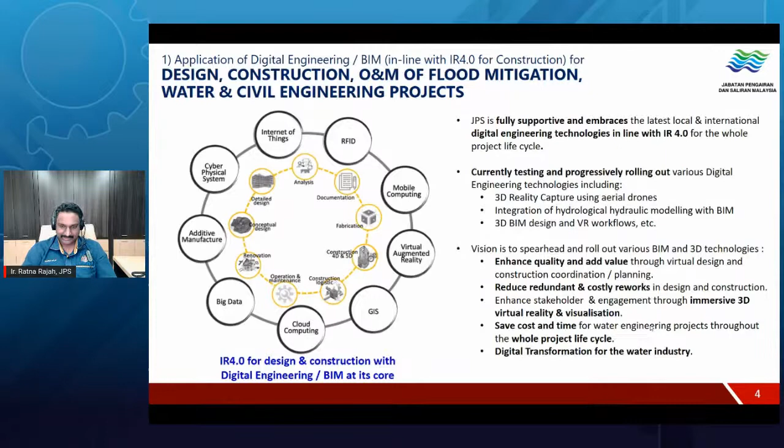Cloud-based project information management and common data environment starts from survey and data collection, design simulation and water resources system, followed by concept engineering design, detail engineering design, construction, and operation and maintenance.

In JPS, the green circle shows what we have successfully implemented, including 3D LiDAR survey, 2D aerial drone image and video capture, and 3D aerial drone photogrammetric survey. We are in the process of further implementation.

In design, we have gone up to 3D integration of 1D and 3D hydrological and hydraulic modeling, water resources model simulation using real-time digital hydrological network and radar data, and digital concept engineering and design. We are already implementing GIS for our planning and analysis.

Under detailed design engineering, we have gone up to the integration of 3D reality capture data for design, which I'll show in the following slides. In construction, we are looking into 3D drone photogrammetry survey and laser scanning, and we have currently applied this together with DBKL in one of our projects.

Lastly, about operation and maintenance, which completes the whole engineering project life cycle, this is digital asset inventory using 2D and 3D GIS, and to monitor the maintenance schedule and so on.

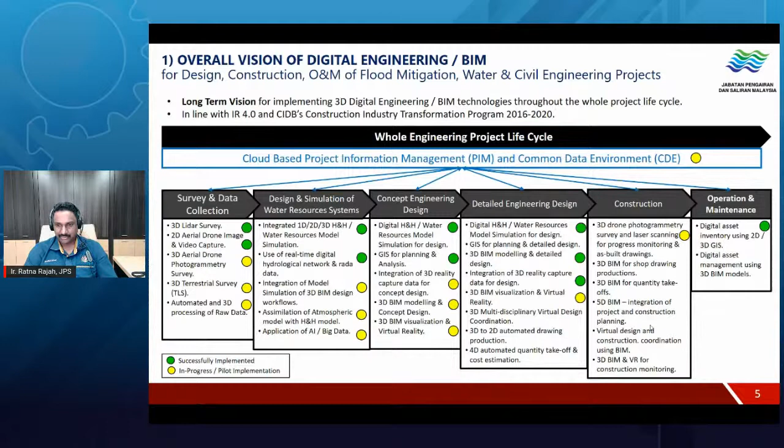So the evolution of the entire design, as you see, from 2010, from 3D GIS and modeling of smart tunnel, and in 2017 we started to use 2D drone imagery and videography. In 2018 we started with 3D drone photogrammetry and reality capture, together with ortho mosaic, digital surface model, digital terrain model, and contour lines using both digital surface model and digital terrain model. Last year we already started to use integration of flood modeling with 3D BIM.

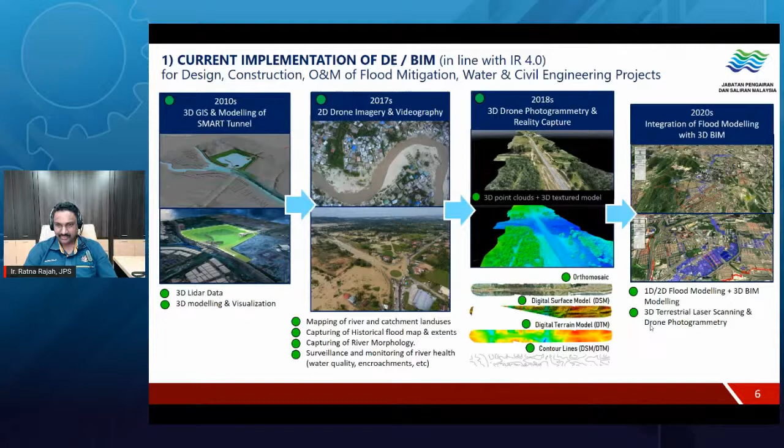I'll show you in the next slides. This is the latest product, developed together with DBKL. This was developed by our local engineer and specialist expert, engineer Chok Ho Seng. He's currently attached to Renhill, heading the water resources sector under Renhill Bersekutu.

And this is what we are looking at. He has vast experience in, if I'm not mistaken, about 6 overseas countries. He has been headhunted to get his expertise on this modeling. This is the way forward for the future.

By having developed this integrating 3D LiDAR data, 3D drone survey, and terrestrial laser scanning, it helps us produce this kind of simulation whereby we can identify and look at what are the best structural measures and non-structural measures that can be introduced to solve the flooding problems.

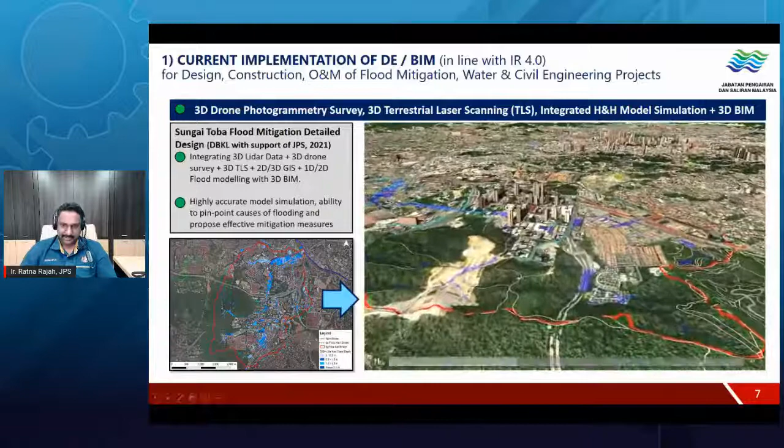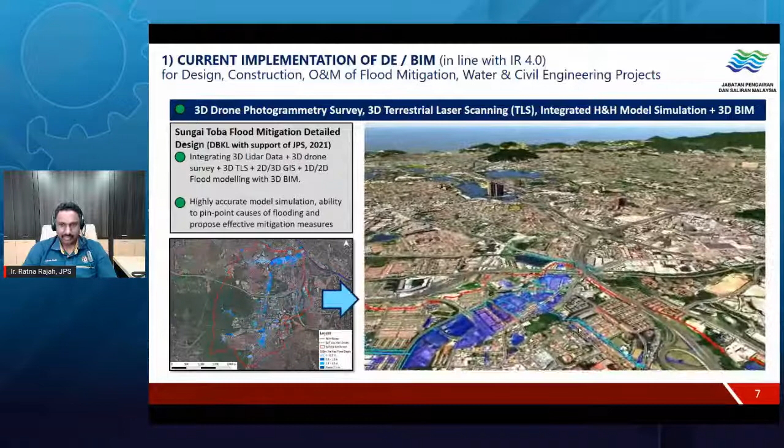The red line shows the catchment boundary. The light blue shows the drainage lines, and then these are the 100-year. The navy blue shows the 100-year ARI simulation showing the flooded or inundated area. So as we introduce structural measures, we can look at how we can reduce the flooding or control it at source approach. I will touch on all that later.

So this is how we will do our concept design of hydraulic structures using 3D drone reality capture and 3D BIM modeling. By capturing the 3D reality capture using drones, together with conventional 2D river topo survey drawings and 3D BIM model, we can merge the entire thing into a 3D reality model used for 3D concept design optioneering.

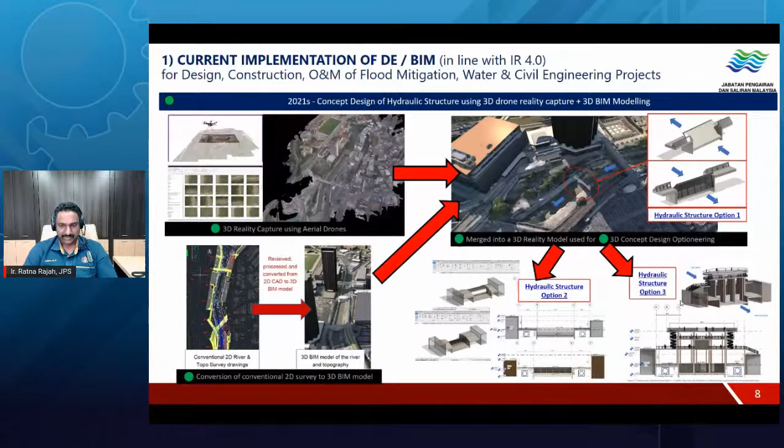So that's option one, option two, and this will be a great way for you to present to your top management, looking at what will be the best solution for that particular matter, the flooding, to solve the flooding issue at a particular area.

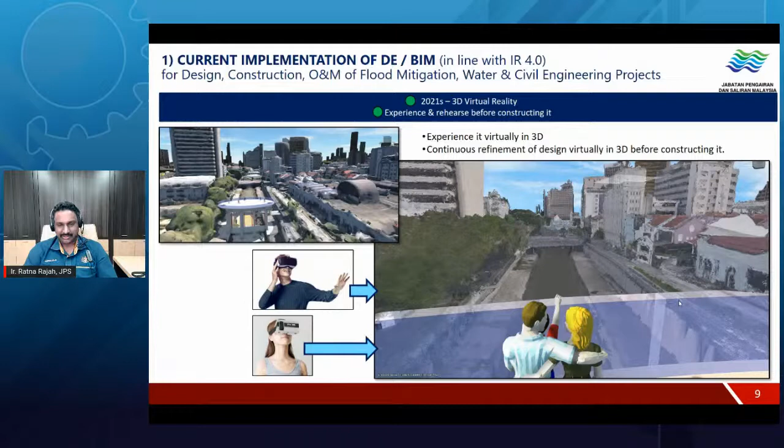And then we can also introduce all this experience virtually in 3D throughout constructing, or before constructing, to see how it's going to be. Continuous refinement of design virtually in 3D before constructing it. All this will save a lot of costs to the government and also to the industry players.

Other current initiatives we are doing include progressively rolling out 3D aerial drone survey and BIM design requirements in recent project tenders. We are exposing and upskilling staff on 3D digital engineering and building information modeling design workflows. We support and contribute to the implementation of 3D digital engineering and BIM initiatives in the local industry. We are continuously testing and implementing digital engineering BIM technologies in various aspects of the project lifecycle by working collaboratively with other agencies and the private sector.

This will be the future and vision of JPS: to continuously roll out various digital engineering and BIM technologies throughout the whole design construction spectrum for the whole project lifecycle, to integrate digital numerical hydrology and hydraulic model simulation technologies with 3D GIS and 3D BIM technologies. This is the most important now.

Apply AI and big data workflow automation to various processes in water modeling, management and decision support, as well as in other design and construction aspects of water projects. This will help river basin managers make a more informed decision when it comes to pressing the button to open the floodgate or not, or to release water, etc. This will help a lot for water managers.

These are the brief topics I will run through with you today, generally Gamuda focused, along with some developments and innovations we have had the opportunity to contribute to the industry over the past 10 years, and some outlook.

For those familiar with IEM journals, I extracted this from an article collated by Engineer Khoo Chi Min and Engineer Dr. Ooi Teck Aun, who are both very famous Malaysian engineers involved in tunneling business. Generally in Malaysia, post-independence, we have completed about 37 tunnels totaling around 300 kilometers since 1901. It may sound a lot, but compared to many developed countries, it's actually quite minimal. By and large, these tunnels were constructed using conventional methods such as drill and blast and NATM, the New Austrian Tunneling Method, though nowadays we like to call these SCL tunnels instead, shotcrete lined tunnels.

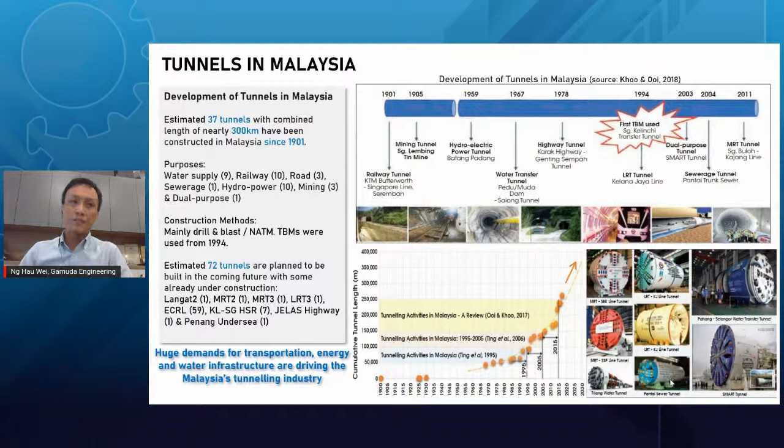The first mechanized tunneling using TBM, or tunnel boring machines, was introduced in 1994 for the Sungai Kelinchi Water Transfer Tunnel project. Around the same time, multiple other projects such as Putra LRT line, Smart Tunnel, Pantai Sewer, and the Pahang Selangor Water Transfer and KVMRT utilized mechanized tunneling methods to construct modern tunnels. Future and under-construction tunnels include East Coast Rail Link, Langat 2 projects, MRT 3 hopefully, and the now shelved high-speed rail project. Myself and Gamuda are very fortunate to be involved in constructing many of these recent tunnels, which I'll highlight in the next few slides.

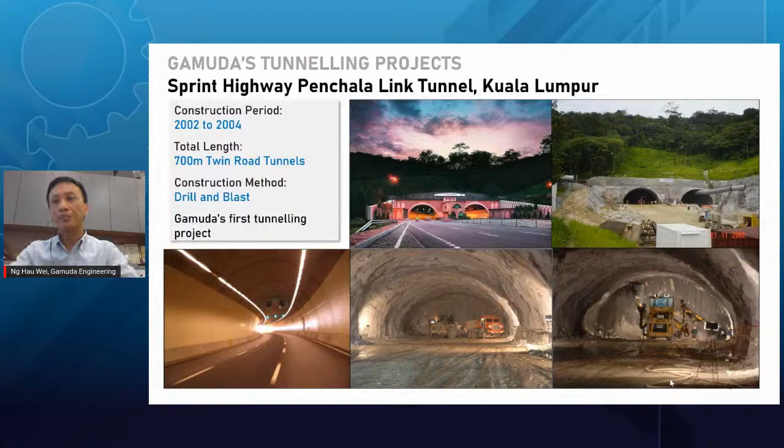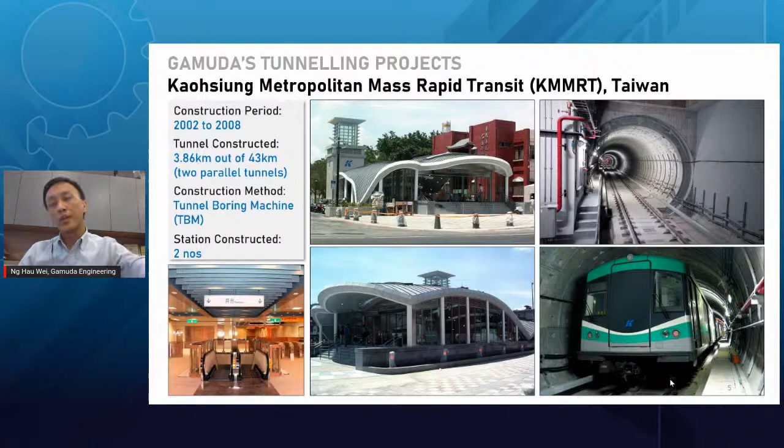At around the same time in Taiwan, we were also busy constructing a metro tunnel for the Kaohsiung MRT. This project was even more significant for the group, as it was our first metro tunnel, as well as our first TBM tunnels. We used 2 earth pressure balance machines for the job to construct the twin 3.86 kilometer tunnels.

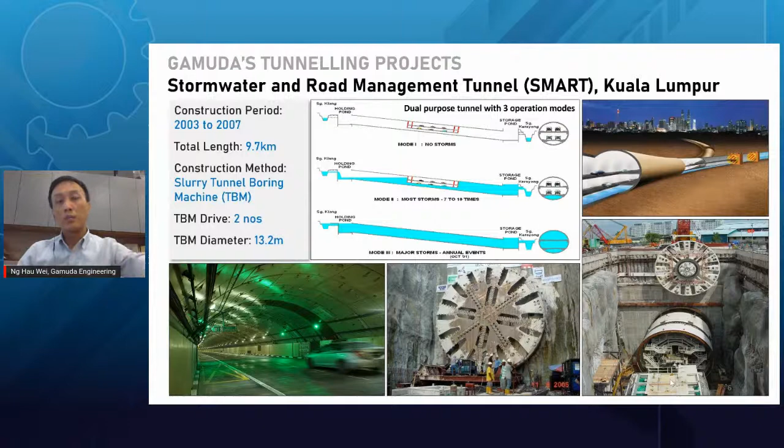Very quickly after that, we embarked on the world-renowned Smart Tunnel project. I was involved in this project myself. Not only was it known to be the world's first dual-purpose tunnel, it was constructed using 2 of the world's largest TBMs at the time, excavating a diameter of 13.2 meters. It was also the first project to ever attempt to tunnel in the notorious Kuala Lumpur karstic limestone condition. More importantly, it was the first TBM tunneling project to be self-performed by Gamuda, a Malaysian contractor.

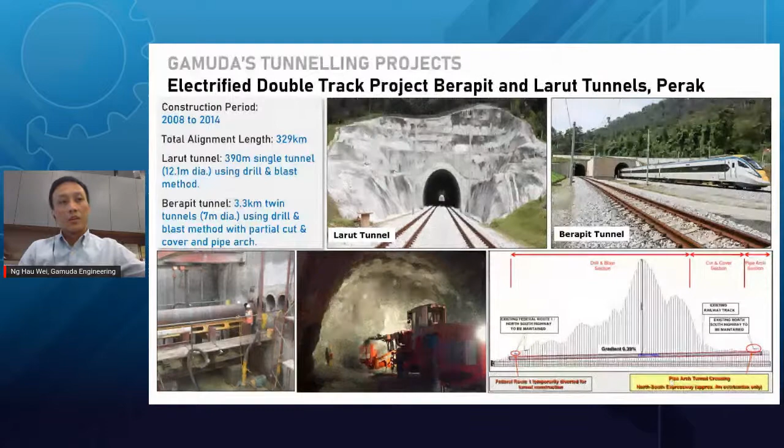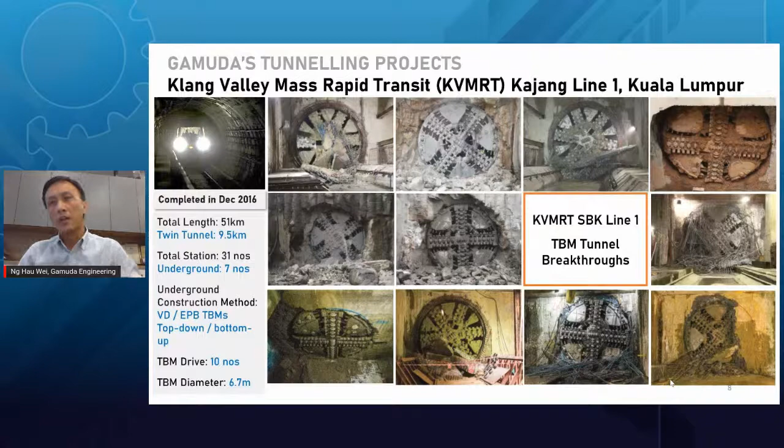Next, we move on to the largest transport infrastructure project that the country has embarked on, the KVMRT Line 1, Kuala Lumpur's first MRT line consisting of 10 kilometers of underground section. A total of 10 TBMs were used concurrently for this project, connecting 7 new underground stations in the heart of the city of Kuala Lumpur. What we are most proud of is the fact that we self-performed 8 of the 10 TBMs, and we invented a new TBM technique along the way and completed the project on time. This would have been the second time tunneling had been attempted on a large scale in the Kuala Lumpur limestone geology.

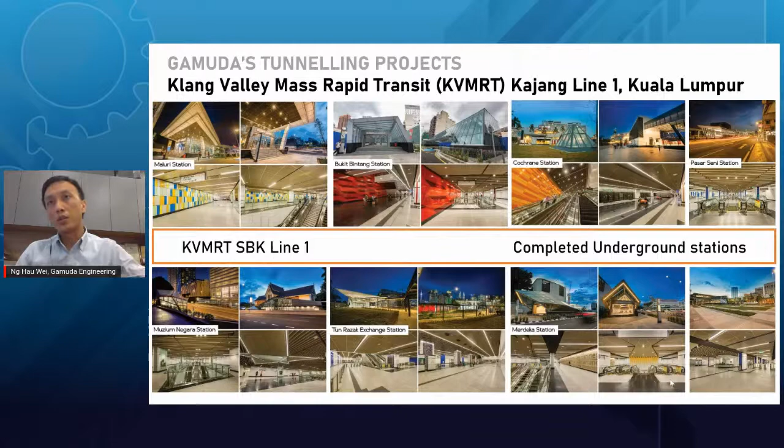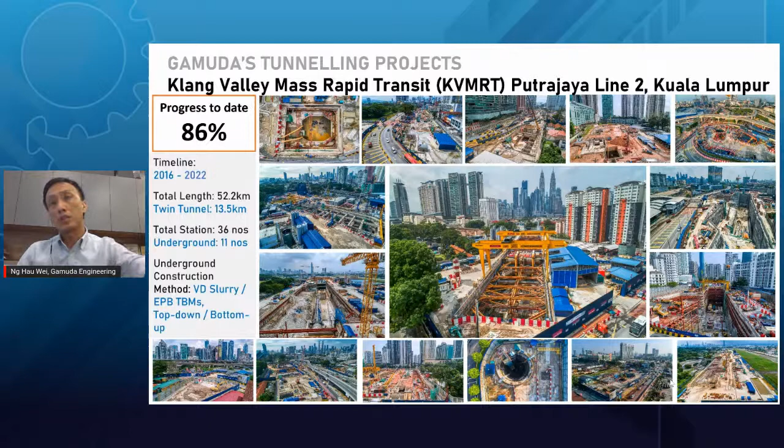We are currently completing the KVMRT Line 2, or the Putrajaya Line, underground portions - 11 new underground stations and 13 kilometers of tunnels connecting them. It is on schedule to be opened by January 2023. As we speak today, without the knowledge of most city dwellers, all 12 TBMs have completed the 16 tunneling drives under the city of Kuala Lumpur. All of the tunneling has been completed, so we are just finishing the system-wide works for the line to be operational by early 2023.

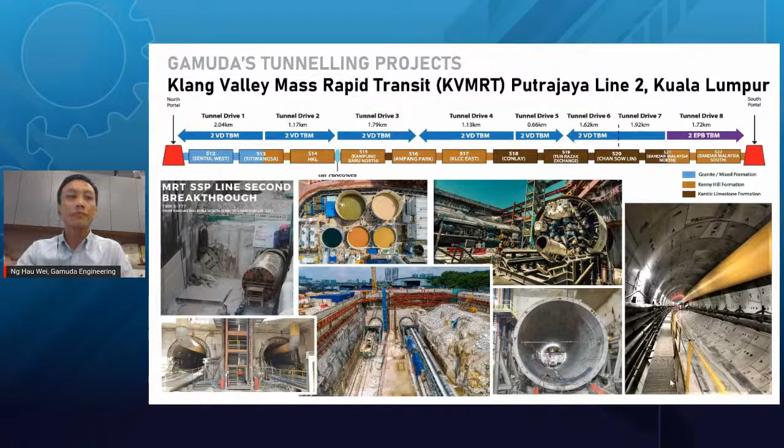Next, I would like to share with you the decades of tunneling ventures by myself and the company. We are very fortunate to be the entity that delivered, in the past 10 years, more than 50 kilometers of tunnels. We were grateful to be able to bring about positive changes to the local and international tunneling industry.

In 2010, we established the world's first contractor-run tunnel training academy, which has since produced about 1,000 graduates who work in our KVMRT projects. In 2019, we were awarded by the British Safety Council the highest safety award internationally for leading the safety culture in our KVMRT project.

In 2014, we were recognized by the International Tunneling Association, winning the Innovation of the Year award for inventing the new variable density TBM to tackle the challenge of tunneling in the karstic limestone geology of Kuala Lumpur. In 2019, we won the same award again for bringing about autonomous TBM, a system that we developed to automate the tunneling operations, and we shared it with the tunneling industry in 2019.

Admittedly, none of this development would have been possible if we did not have the rollout of significant scale tunneling projects like KVMRT Line 1 and Line 2.

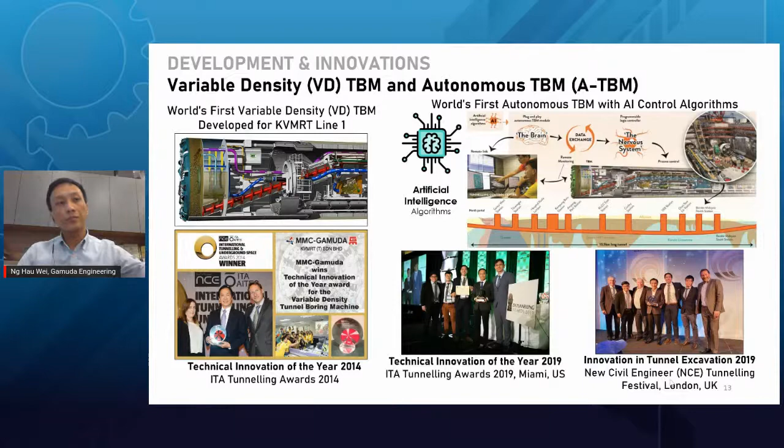Looking forward, we are very eager to see the commencement of KVMRT Line 3, which we anticipate will have an equal or larger amount of tunneling works as KVMRT Line 1 and 2, as well as the revival of the high-speed rail if possible, which would consist of several tunnels, one of which would be 8 kilometers long just south of Kuala Lumpur city. Without more tunneling projects, it is likely that we would lose momentum in building up our local talent pool and supply chain, which has seen tremendous progress in the last 10 years during KVMRT Line 1 and 2.

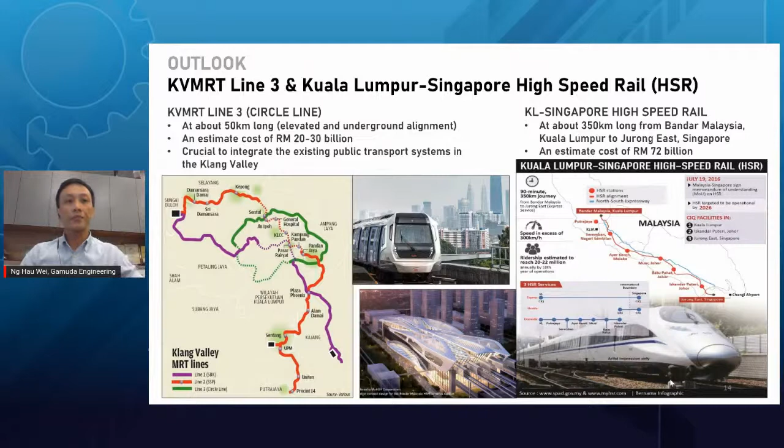Longer-term plans, in my opinion, on infrastructure planning should be the priority of the government of the day, should we intend to grow this industry. However, as a private company, we can't rest on our laurels.

Numerous tunneling infrastructure projects are being aggressively rolled out in these markets, and we are very enthusiastic about our participation there. At the moment, we are already in the midst of tendering for several projects in each of these markets, and we are hopeful and optimistic that we will be embarking on delivering one of these in the coming years. All in all, onshore or offshore, I myself am greatly positive about the outlook of the industry, and we are eager to hit the road running once we are out of the pandemic, and when we gain a bit more political stability over the coming months.

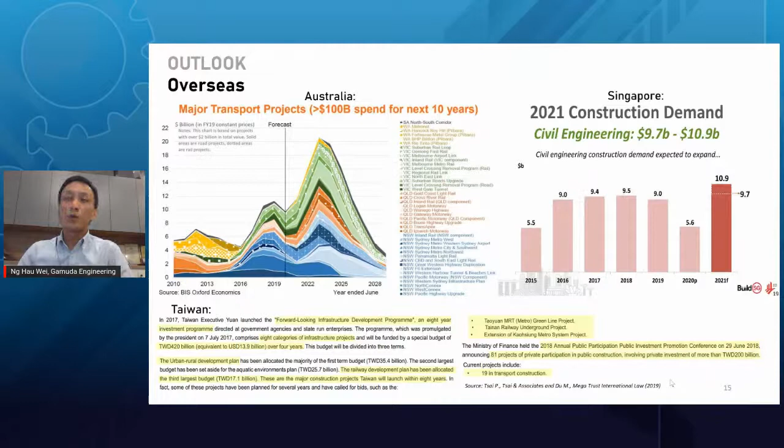That's all I have to share today. Hopefully I can answer some interesting questions for you. Back to you, Engineer Dr. Lee.

Thank you, Mr. Ng, for sharing your valuable experience with us. From the sharing, we have managed to learn some of the tunneling technologies, beginning with drill and blast, and after that the normal TBM, the tunnel boring machine, and after that a more advanced TBM invented by our local engineer, which are the variable density tunnel boring machine and also the autonomous tunnel boring machine. With that, I would like to thank Mr. Ng again for the sharing.